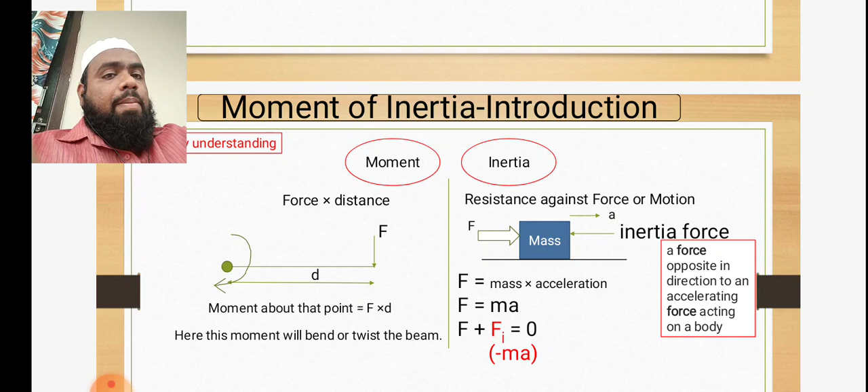Now, in moment of inertia there are two categories: area moment of inertia and mass moment of inertia. What is area moment of inertia? As we discussed earlier, there are two topics: centroid and center of gravity. Both belong to a single point, where the total body's mass is acting, where the total mass is concentrated, the balancing point. If you do the same thing for a plane, meaning a 2D body.

What is 2D? Negligible thickness. If we have negligible thickness, it is considered a plane. If we have considerable thickness, then we call it a solid. So if you find moment of inertia for planes, it is area moment of inertia. If you find moment of inertia for masses, solid bodies having considerable length, height, and thickness, then it is known as mass moment of inertia.

So as we discussed the points, area moment of inertia is defined as the resistance offered by the object either to bend or deflect. A mass moment of inertia is defined as the resistance offered by the body to rotate due to its own mass. Here the inertia is independent of mass and it's dependent on the dimensions of the object.

Because we do not consider the mass in area moment of inertia, because in area moment of inertia the mass will be not considerable, because the thickness is very less, not considerable thickness. Negligible thickness means what? Negligible thickness means no considerable mass. But here it requires the study of motion of rigid body. So this is why I have to go through this moment of inertia.

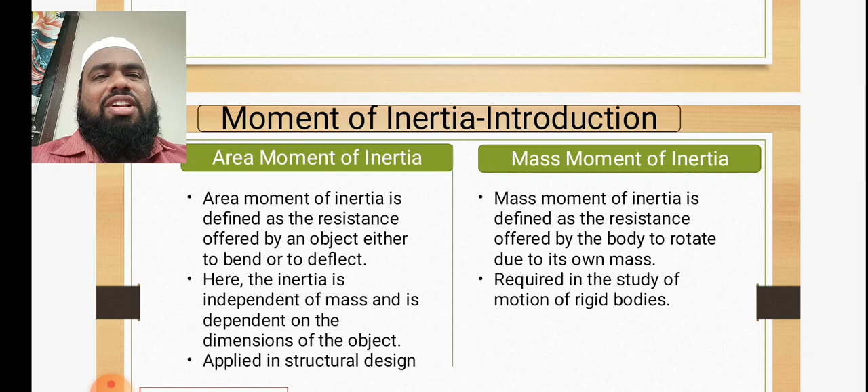What is the use? These are applied in structural design for civil people especially, and mechanical people also. Mechanical people are designing machines. For designing any machine, for designing any member of the machine, we have to go through this moment of inertia. Moment of inertia is nothing but the resistance to rotation, simply say.

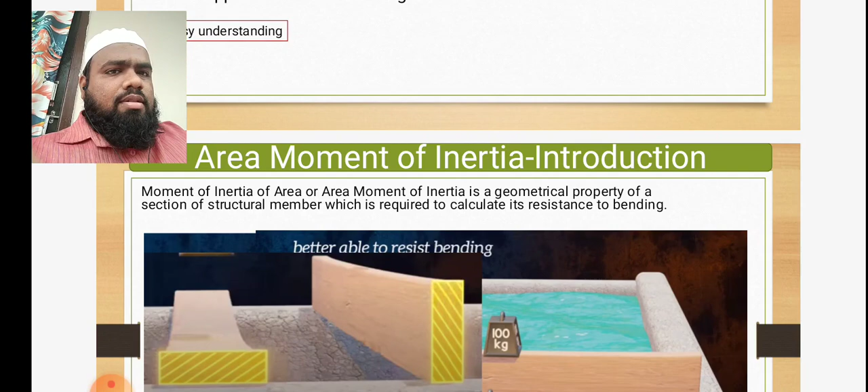So next, now we'll come to area moment of inertia introduction. Moment of inertia of area or area moment of inertia is a geometrical property of a section of structural member which is required to calculate its resistance to bending. So up to what extent it can resist itself from being bent. I applied a force, it won't bend. If I keep on increasing the force on the body, then at a particular point it starts bending. So till what point it can resist, it can hold the force, it will protect itself from being bent. That is called moment of inertia.

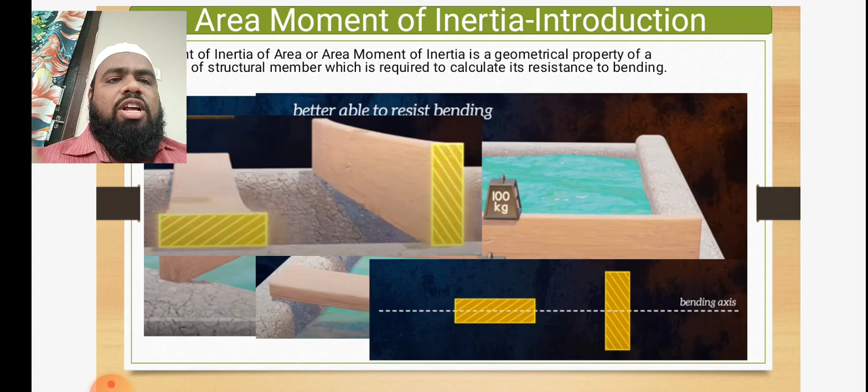As you see, there are structural members. I have applied 100 kg of force, and the horizontal section and the vertical section, that is known as bending axis. You study, you take time for this, you can understand better. So now come to area moment of inertia. Mathematically, the moment of inertia of a section can be defined as.

So now, if you take a plane and ask, what is the moment of inertia of this plane? That's the wrong question. Moment of inertia is always calculated about an axis. So whenever we call a moment of inertia, we should mention the reference axis. About what axis? X axis or y axis or z axis or any other reference axis. So that is very important.

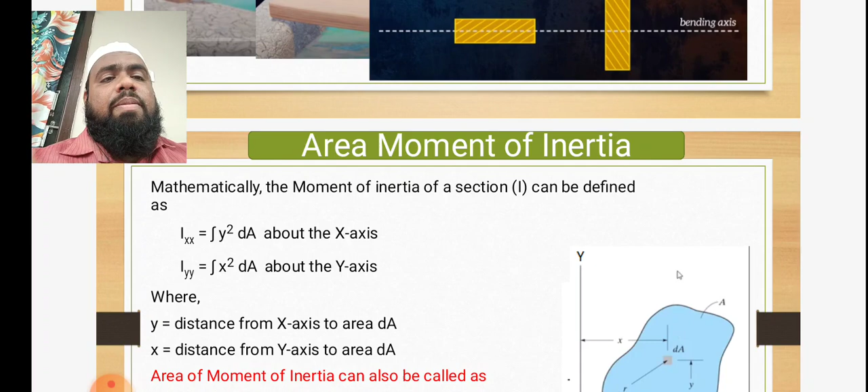Moment of inertia is denoted by capital I, and moment of inertia about x axis will be denoted as Ixx. Moment of inertia about y axis is Iyy. And similarly, what is moment of inertia about z axis? Izz. Clear? So now the moment of inertia is nothing but integral of y square dA about x axis. What is this y? What is this dA?

Y is nothing but the distance from centroid of the plane to the reference axis. What is the reference axis? Ixx means the reference axis is x. So the distance from centroid of the plane to the x axis is y, as we see in the figure. Look at the figure: the distances are x, y, r. Distance from centroid to x-axis is y, distance from centroid to y-axis is x, distance from centroid to z-axis is r. So we are finding the moment of inertia about x-axis, means Ixx is equal to integral y square dA. Integral y square means distance square.

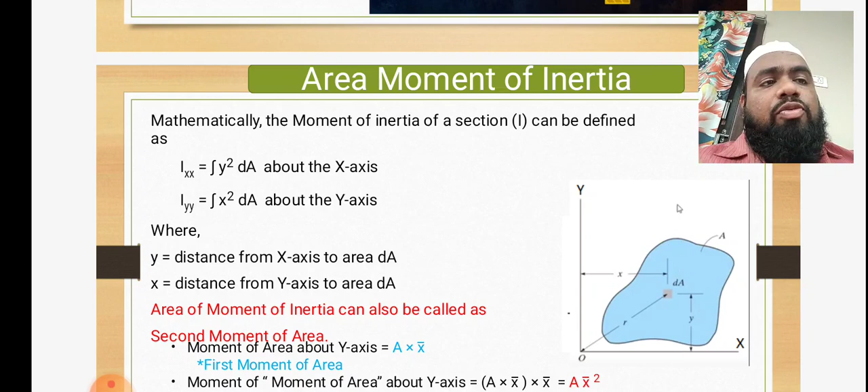Similarly Iyy: from centroid of the figure to the y-axis, what is the distance? X. So Iyy is equal to integral x square dA. This is the formula to find out the moment of inertia. So area moment of inertia can also be called as second moment of inertia, second moment of area. Moment of area about x-axis, y-axis is a into x. Moment of area is nothing but

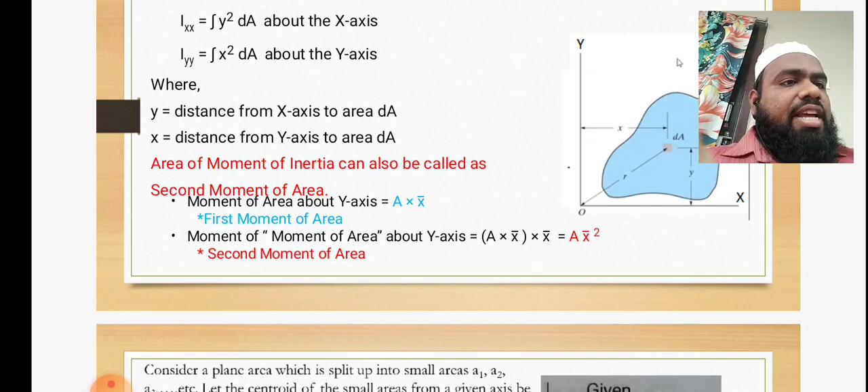area into distance. Moment of a force is force into distance. Moment of something is something into distance. So that is the formula, remember like this. So moment of area is nothing but area into distance. As you see in the blue color words, a into x bar, the first moment of area. Now come to the second moment of area, the moment of the moment of area. What I told you, moment of something is something into distance.

Now what is the moment of the moment of area? Moment of area into distance. As we know, moment of area is nothing but a into x bar. Now a into x bar into x bar, so a x bar square. X bar is nothing but the distance; you can call it x or x bar, whatever it may be. So the second moment of area is nothing but area moment of inertia. Second moment of area is nothing but moment of inertia.